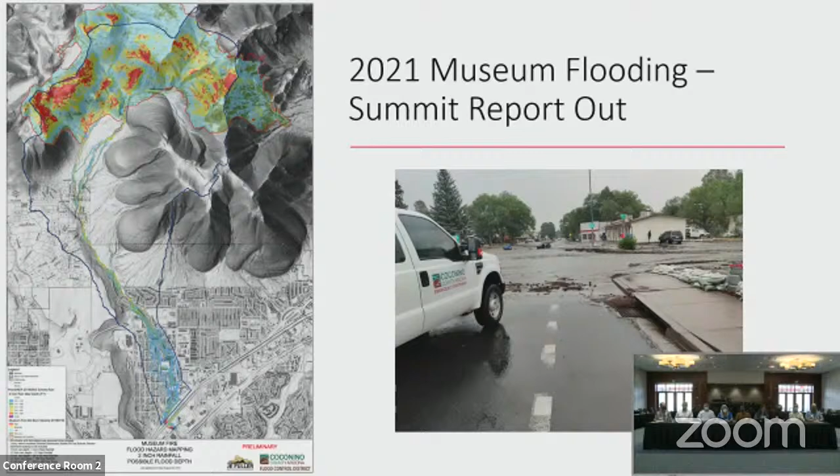I'll walk through the participants and summit agenda, and then be turning it over to Joe Leverage to my left here, as well as to Julie Lead, who's to my left. I first, though, want to introduce the rest of the attendees at the summit. Some of them served as what we call table leaders during the workshop session yesterday.

To my far left is Mark Lamer. Many of you know Mark. He's been tireless out in the museum flood area working with residents. And next to Mark is, oh geez, I knew this would happen, Stephen Irwin. Sorry, Stephen. Stephen too has been out in the flood area working with many of you. Gary Miller is an engineer with the city.

Julie, Joe, myself, Christopher Tressler serves as both the county engineer and the flood control district engineer. Andy Bertelson, public works director for the city. As well as Caleb Lanting with Peaks Engineering. And so these were the people who participated. We had over 50 participants. And again, just a truly robust discussion coming out of that brain trust.

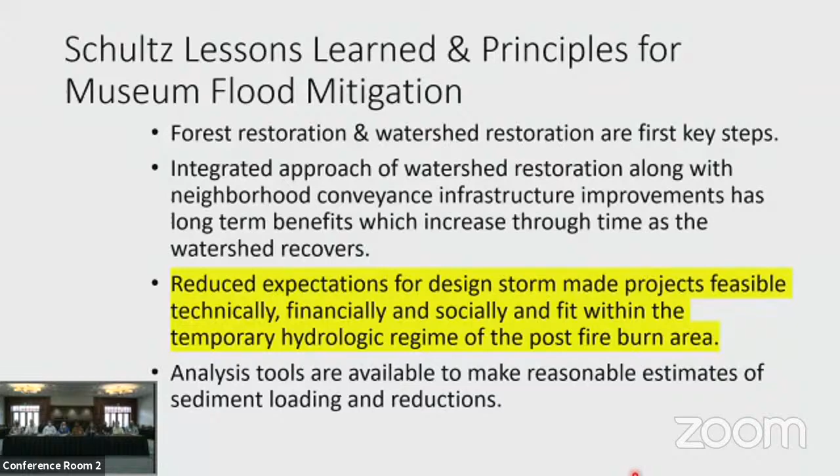And again, I want to reiterate those feasibility criteria. It has to be technically, financially, we say socially here, but really it's technically, financially, legally, and then environmentally and culturally feasible. And that's the next step, to start looking at that feasibility. Fortunately, we do have analytic tools that can help us make reasonable estimates of sediment loading and those reductions. And you'll see that high on the list of next steps. On to the next slide here.

I think one of the most important messages, and this is a tough message to deliver, but we will design to some target storm, possibly some range of storm level. You hear 100, 200, that type of thing. We're probably down in 5-10-year storms in terms of this post-wildfire. But we will not be able to design to every storm. It is not physically possible. It's just not feasible. All those factors of feasibility won't let us design to every storm. What we do will help reduce the impacts during larger storms, but it won't eliminate those impacts. And that's really important to understand.

And importantly, we really emphasize, and one of the important reasons to do this summit was, it's about relationships. We really understood that with Schultz, like the relationship that we had with the Forest Service, the relationship that we had with the various regulatory agencies, the relationships we have with funders, the relationships that we have with the community. Relationships are key.

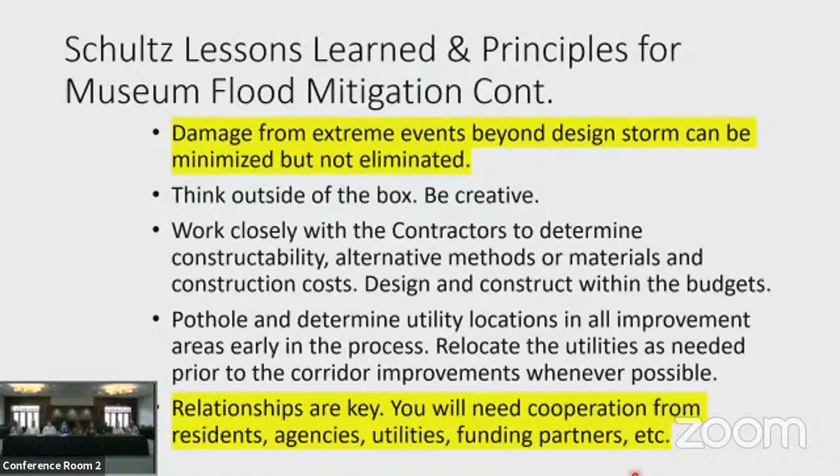And again, just that sense of caution that these are ideas, and you're going to hear a lot of ideas, and they're not all going to get implemented because some overlap. And as you work through, you may add something else, and you may take some other piece of the puzzle. This is a very complicated puzzle that we're building. So with that, I'll turn it over to Joe. Thank you, Lucinda.

One of the main questions that we had to discuss during this is the hydrology. What is the design flow? How much water are we going to design the downstream infrastructure to, or mitigation alternatives that we come up with? To give a reference point, in Schultz, the 5-year, 6-hour design storm was chosen for all the improvements, and those varied in the corridors from 200 to 400 CFS. And I'll give you a reference point when we're talking through some of the numbers on Spruce Avenue Wash.

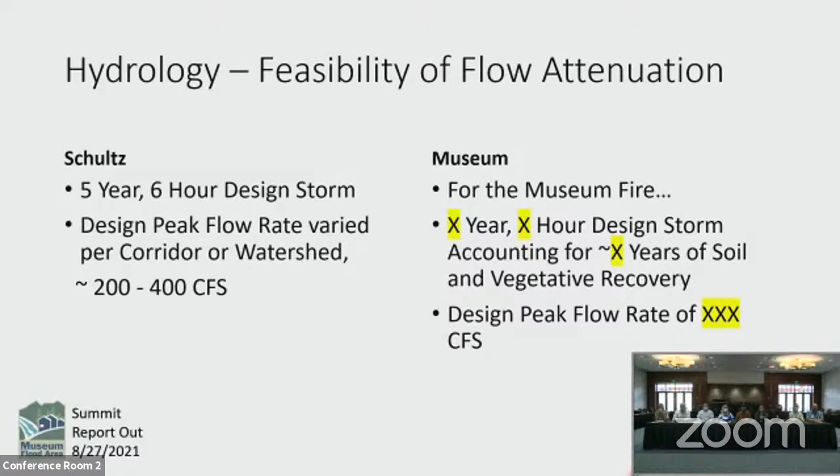So the question is, for the Museum Fire, what is the year event? What is the probability of that event that we're designing to? What hour design storm? And how much recovery are we assuming will happen in the watershed over the next period of time when these improvements are being implemented? And to frame that in a little bit, give you a little bit of background on some existing pre-fire numbers that are out there.

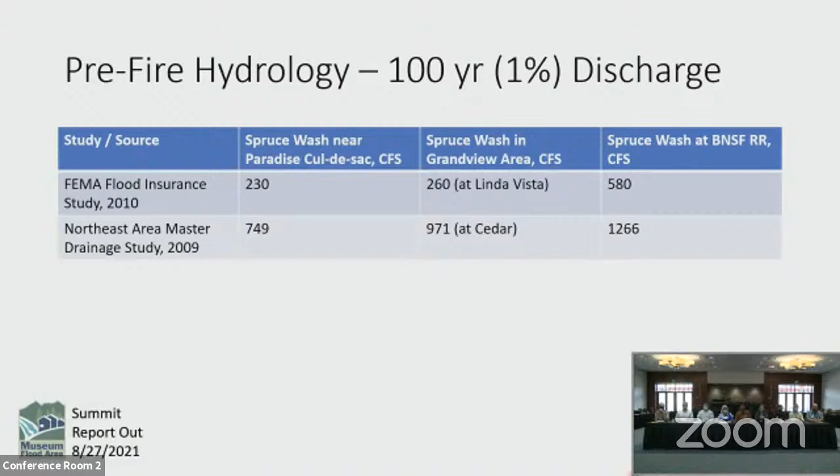So the FEMA flood insurance study, I'm not going to dive too much into the numbers, but it's a pretty low flow, 230 cubic feet per second. The Northeast Area Master Drainage Study from 2009 modeled that higher at 749 CFS at Paradise. So there's kind of a big variability in even pre-fire flows that could potentially come off the watershed.

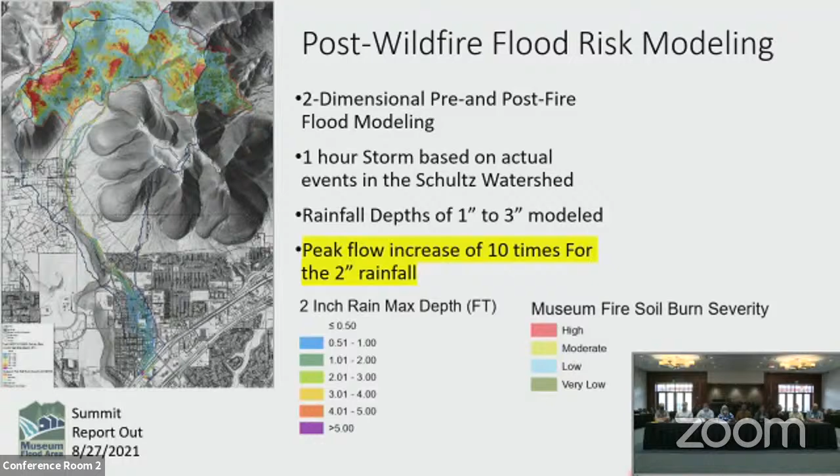So to backtrack a little bit, the post-wildfire flood risk modeling that was performed in 2019 was done for very specific rainfall events that were experienced in Schultz. Very intense 1-hour rainfall events that we wanted to provide a variability in what the downstream impacts were. So a 1-inch to a 3-inch storm event. For a point of reference, between pre-fire and post-fire, flows increased approximately 10 times in the modeling. So we have much higher flows, as we've experienced in the 2-inch rainfall event.

So far this season, to give a little bit of context to this discussion and why we are where we are, there's 4 rainfall gauges within the watershed. One of the gauges was installed in 2018, and you can see that in the green bar. That rain gauge had about 10 inches of rainfall on it in 2018. The next red bar and dark blue bar, these are the rainfall that we experienced in 2019 and 2020, very low, our period of nonsoons, as it was termed.

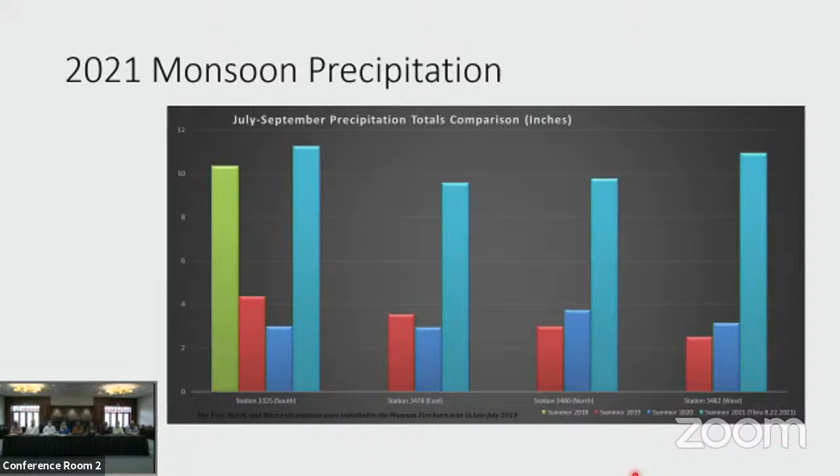To date, in this monsoon, we're right about 10 inches plus or minus of rainfall, much higher than we've previously experienced and higher than normal for this time of year. So that gives a little context to why we are seeing the rainfall, the flooding impacts that we are. And monsoons are not finished yet. Correct. Monsoons are not done yet.

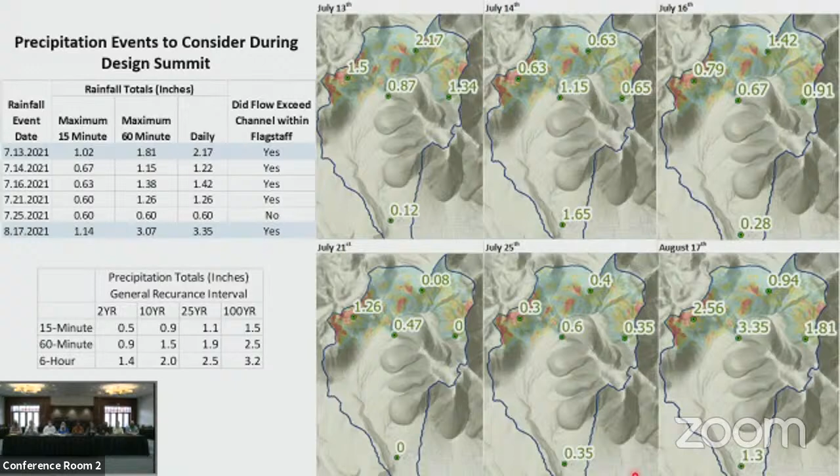So I'm not going to dive too much into this slide, but what I want to express with this is that with each of these rainstorms, this is a dynamic watershed. It's constantly changing in channel conditions. Every storm is unique that impacts the watershed. And we as a team are keeping a very close eye on how each of these storms impact the watershed, what that looks like downstream, and taking that into consideration when we're planning for mitigation alternatives.

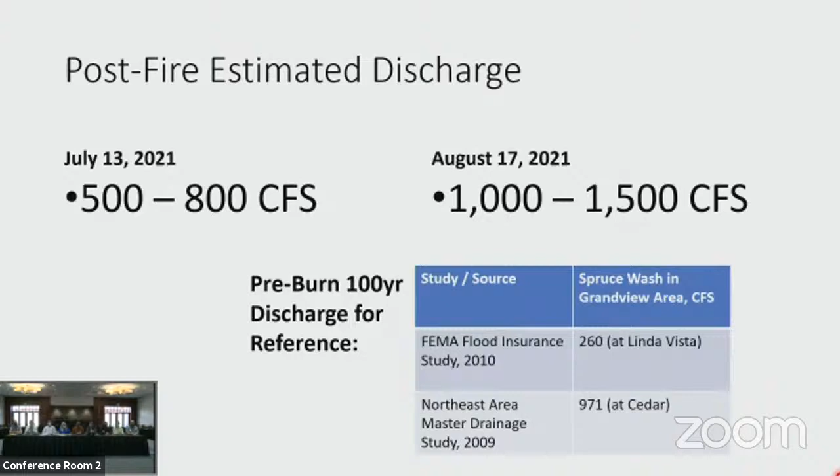So to give a little context also now for a couple of the flood events that we've experienced, the first one and the last one last week. So the first one's approximate range is 500 to 800 CFS by the time you hit Linda Vista, to put some bounds on that. And the storm event this last week was in the range of 1,000 to 1,500. So it was a lot larger, as we saw in the watershed with the higher rainfall values. So much higher than you're ever going to experience pre-fire. And that's what we have to wrestle with at this point.

Okay, so identifying what our design discharge is is a complicated discussion. Something that we've wrestled with over the last couple of days, and we're beginning to put some brackets on what we think are design storms that are not only feasible to design to, but also provide a relative level of mitigation for the impacted areas.

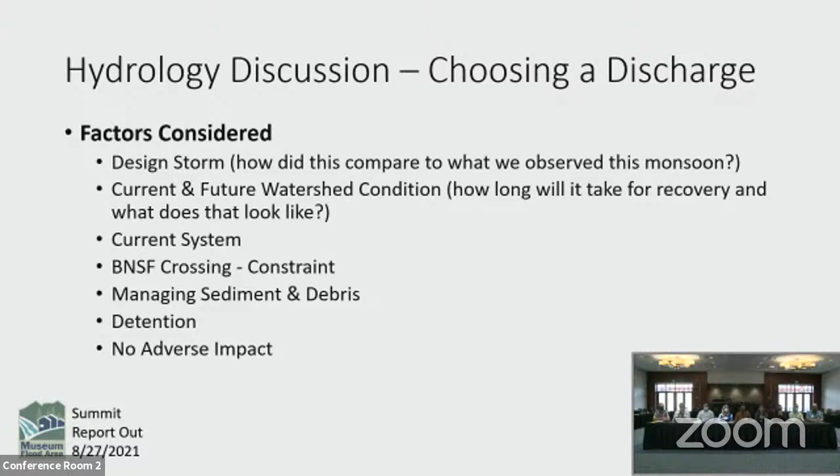So we want to consider how does our selected design storm compare to what we've observed this monsoon? And then looking forward, what's this watershed going to look like in 10 years? How much recovery is going to happen? And then how does all of that variability in the watershed play into our current system? You know, we have constraints like I-40 and the BNSF railroad crossing downstream of Route 66. We have constraints of existing infrastructure, and so these are all components that we're wrestling with to try and determine the design discharge that gives us the most benefit that we can reasonably implement.

Some considerations also are what happens upstream. How much sediment and debris is managed on the alluvial fans upstream of Mount Elden Estates. And if there is any attenuation, reduction in flow rates through detention, if that's even a possibility, and like Lucinda said, we really need to now dig into the details of that. And again, using this design discharge to then understand what potential adverse impacts are with each one of these projects that we're going to talk through.

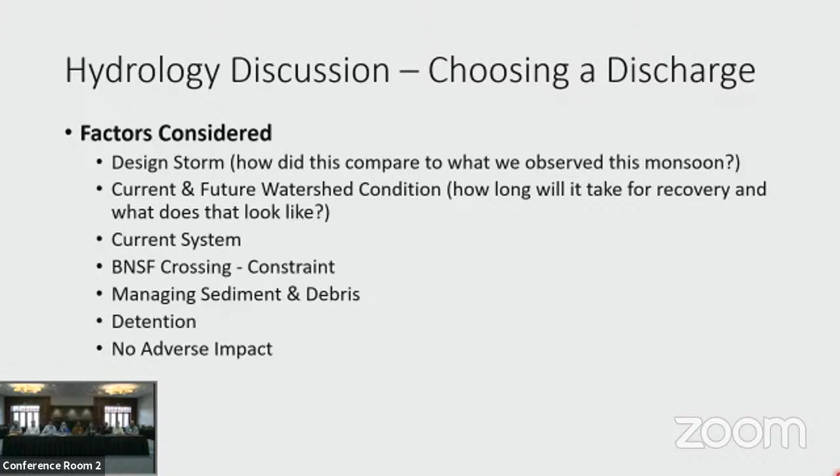And to go along with that, the feasibility criteria. So we're in the conceptual phase. We're in the idea to conceptual phase. And what needs to happen from here is understanding the feasibility. So like Lucinda said, it's from the technical, financial, legal, environmental and cultural aspects. And there's a lot that wraps into that. And as a team, we'll be honing in on what our design discharge is, and we are not quite there yet, but we're moving towards understanding that.

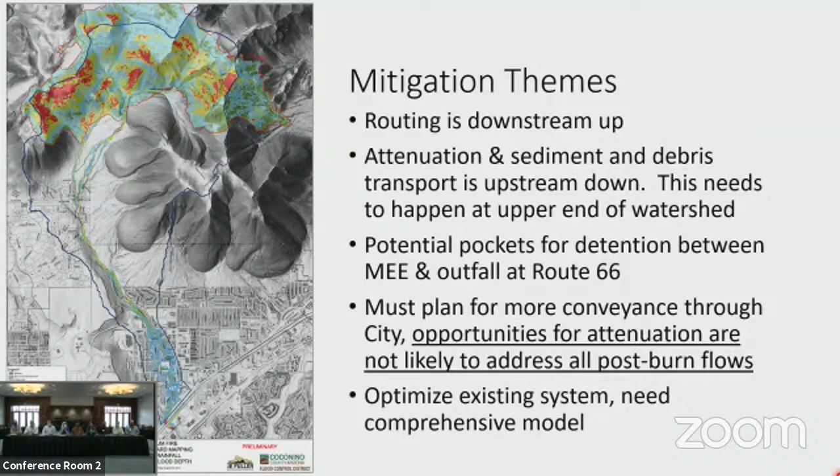So I'm going to start at the very top of the watershed. The objective at the top of the watershed is to reduce our sediment load, to reduce that large woody debris coming downstream and plugging the system. We need to look at forest restoration in the non-burn area, as Lucinda had said earlier. And then there's an opportunity here for an alluvial fan. And I'll show you what that might look like on the next slide.

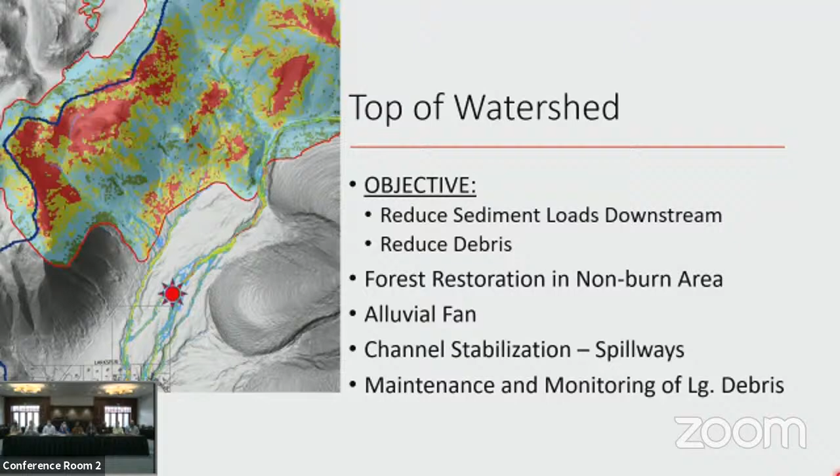We also talked about channel stabilization and the challenges with channel stabilization. The terrain in this upper watershed is so steep. It is difficult, if perhaps not impossible, to get large equipment and material in there to perform that work. And then maintenance and monitoring of how that debris flow happens, how that sediment moves, will be a long-term, ongoing effort.

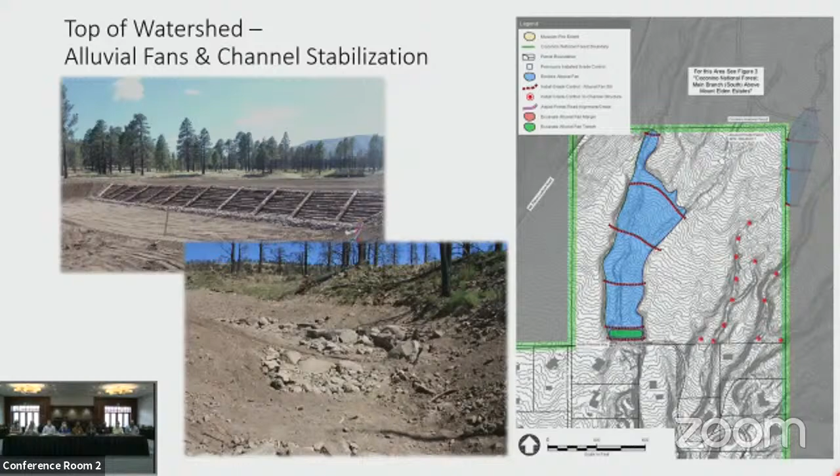So moving a little bit south on this map, this is the end of Paradise right here. Thank you, right there. And then we have the Mount Elden Estates neighborhood. And this is Forest Service in this zone. As we talked about possible mitigation in this area, we talked about channel improvements through Mount Elden Estates. There's some variation, there's some scour happening, and we need to get in there and do some work to help stabilize that channel, to have some consistent capacity through that channel section.

As we move downstream, just north of Paradise, there, this is an opportunity for a possible offline basin. Things that we wrestled with, things that we talked a lot about as groups: What is the access to that? We know how much maintenance a basin requires, ongoing for the duration. And how do we get there? What does that look like? What does that mean? Is it feasible? There could be that smaller area for attenuation.

So just a quick definition on what that means. Attenuation is when we hold back the water and then slowly release it over an extended period of time. Instead of having a large rush of water, we just slow it down. It doesn't change the volume of water. It just holds it back and slows it down. And that's the purpose of a detention basin, is to provide that attenuation to reduce some of those surges.

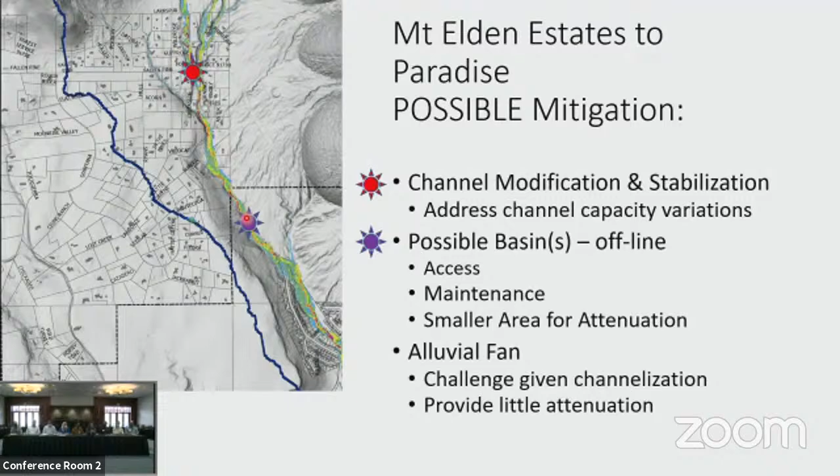And as we said before, some of this upper part of the watershed, we're really focused on that sediment removal, or sediment reduction. It's impossible to remove. Sediment reduction and debris removal and reduction. And I would say one of the primary purposes for that sediment removal is to help the systems that we have in place today function better than we're seeing in the condition of flows that we're getting right now, because we're getting a lot of that sediment transport into the city systems that is frankly causing problems currently. Clogging it up.

Thanks, Gary. All right, we're going to move downstream a little bit. This is the cul-de-sac on Paradise. And then right down here in the bottom right of the image, that is the culvert crossing at Linda Vista.

Through here, we talked about channel widening. We have gotten the nod of approval, Christopher, from US Forest Service to do some channel widening at the pinch point, the existing pinch point at the very top of Paradise. And this is great news and work that we can move on very soon. So there'll be some widening at that location to provide some additional capacity.

We did talk about possible more permanent barriers through this section. That's not necessarily in the immediate work that I just mentioned. That's channel widening. And then as we move a little bit further south, right down there, sorry about that. At the end of Park, there is great access to a city-owned parcel, and there may be an opportunity at this location to provide some attenuation, provide an additional area for sediment dropout. It's got great access and we can make the most of it at that location.

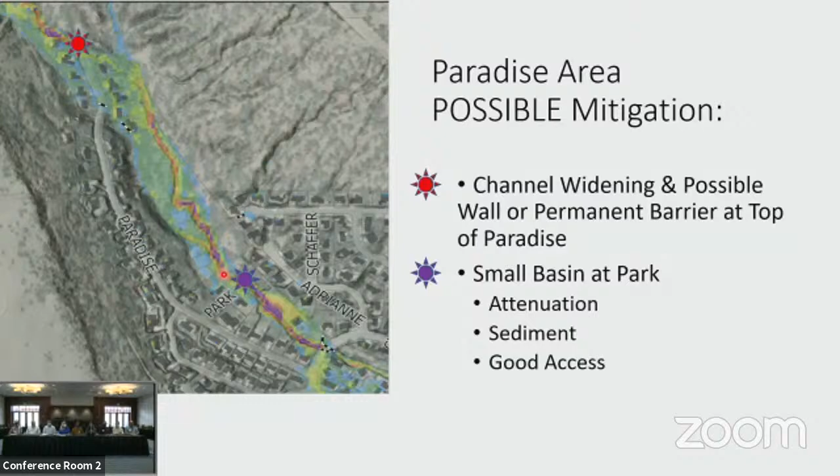And I'm going to go to the next slide to talk about the Linda Vista crossing, which is right up here, Linda Vista. This is the Y, or the wedge, I think is what we're calling it, at Cedar at the slip lane. And then we have Cedar in the bottom part of the photo here. Now, Linda Vista, we need to follow to the outfall. So as we talk about strategies like storm drain infrastructure or increased channel conveyance, we have to chase that all the way down, all the way south.

So as we talked about as a group, opportunities to go to the east side of the existing channel or to the west side of the existing channel, we know that we need to chase that all the way down through Sunnyside to Route 66. I believe I could say with confidence, it's unanimous in the engineering group that we need to look for bypass, that we need to look for additional conveyance at the Linda Vista crossing. And that simply increasing at the Linda Vista crossing for a larger storm event would be pushing a problem, causing some adverse downstream impacts. So we need to look for an alternative route.

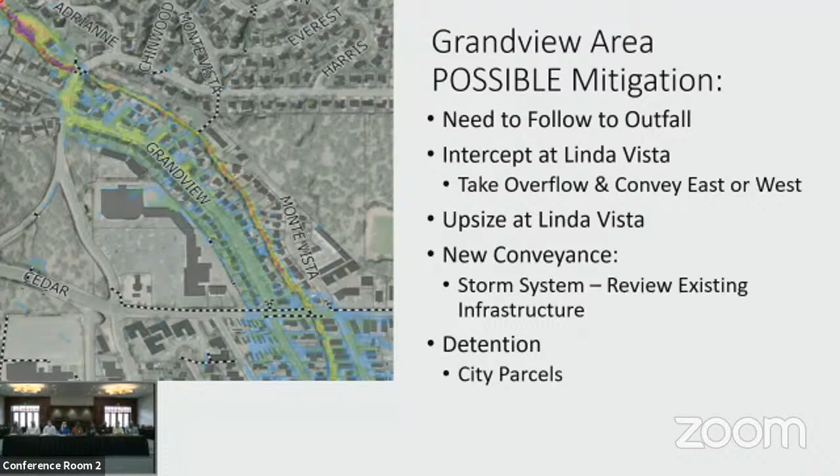Thanks for that, Gary. So moving through North Sunnyside, possible mitigation, I think we can say we all generally agree we need to maintain. There's a 60-inch storm drain that runs under a portion of the channel. This is just north of Arroyo Seco and the townhomes, that inlet. I think many that are watching today are fairly familiar with that. We've got that section of storm drain at that inlet, and that extends all the way south. It continues all the way to First and Route 66. And it is important to maintain that system. It has good capacity. It certainly doesn't have enough capacity for these post-burn flows that we're seeing, but it does have capacity. So we need to maintain that.

We talked about some channel hardening to increase the conveyance. So when I talk about channel hardening, I'm talking about concrete, riprap, slurry, some of those materials to help with erosion on that channel, to help with efficiency on that channel.

And then, as I mentioned before, we need to chase that east or west conveyance further downstream. So this is the current crossing of Spruce Wash at Cedar. And so as we look to possible bypass conveyance, we're either going to be running down the west side of the Sunnyside neighborhood or the east side of the Sunnyside neighborhood. And where do we see opportunities where we don't have as many underground infrastructure conflicts, where we might be able to use an existing system line and be able to upsize that?

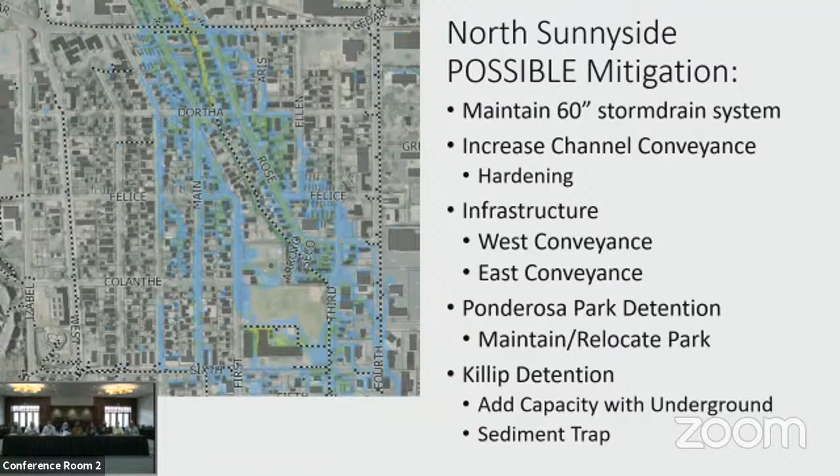Moving on to South Sunnyside. Sixth is at the very top of the image here. And then you can see this is the railroad down here in the bottom right corner of the image. And again, it comes back to chasing those east or west bypass flows all the way out.

We talked about that detention basin possibly at Killip Elementary School, perhaps an expansion of that basin to Ponderosa Park, but we also recognize that the park is an amenity. And to turn that into something other than its current use, we would need to find park space or be able to have both of those uses, which can become challenging.

We're also chasing this all the way down. If we upsize the infrastructure all the way to Route 66, all of a sudden we're increasing how much water is getting to that area. And we need to look for opportunities again for detention. So another one of those pocket areas is perhaps close to the outfall.

So the outfall of Spruce Wash is at the Blimpie, the giant station at 1st and 66, a little bit across from Salsa Brava for reference. There might be an opportunity just to the south and west of that location, if there is a new outfall point, to provide that attenuation, because we can't be sending more water underneath BNSF Railway than we do now.

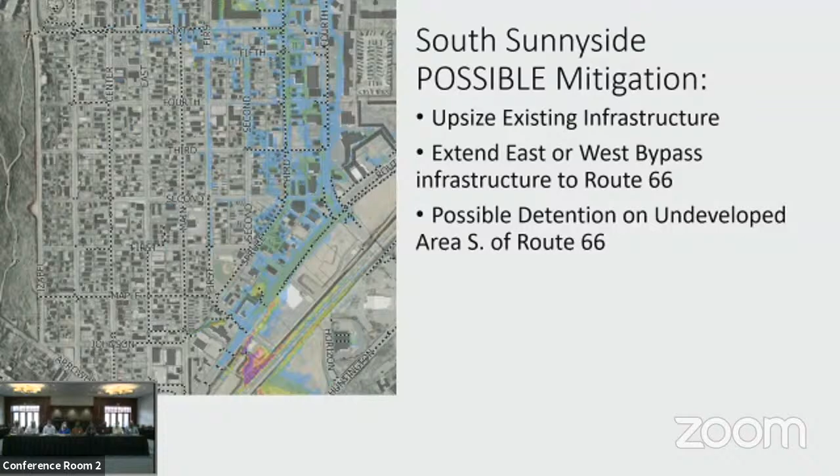So with that, I'll turn it over to Lucinda. Great, thank you, Joe and Julie. I think that's an important overview of what was involved and what came out. Obviously, there was a tremendous amount of detail that was discussed of a very sophisticated technical nature. I think you both did a really great job boiling that down and providing a good sense of what some of those opportunities are.

We put this slide in because it's so important to understand that in everything that is done, we have to make sure we're not creating any adverse impacts, either upstream or downstream. And so in this process, there's actually a whole system nationally that's been developed to look at this. And we did this in Schultz.

One of the policies that was adopted by the Flood Control District Board of Directors was to adopt a no adverse impact set of standards. And that analysis was done by an independent third party engineering firm with that expertise.

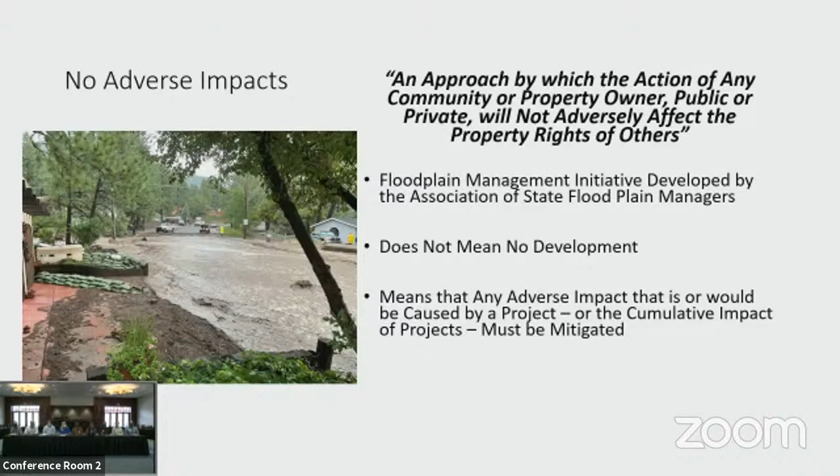So the other things that I want to just talk about, and I think you can go ahead and go to the next slide here. Before I jump into that, I'll come back to that. Let's go ahead, we'll go to the next slide here to the next steps. So in terms of next steps, these are really what we see as some of the crucial next steps. First is developing that overall drainage master plan. And this is particularly crucial. It is an integrated system, above and below the city, but it's particularly critical for the city infrastructure and looking at, as Joe was saying, how do we best optimize the system in the city?

Another two key steps, as I mentioned earlier, are crucial: we've got to get the rest of the watershed up there thinned. That forest needs to be restored. That watershed needs forest restoration. And in addition, that watershed restoration work that's largely on Forest Service land needs to take place. Those two are fundamental to everything else we're going to do. And the alluvial fan work, when we say watershed restoration, that's working with those alluvial fans to make sure that they have the long-term capacity to capture and reduce sediment, and whatever channel stabilization we can do to reduce sediment production. And then another factor we talked about is dead trees. As those trees that were burned die, they're going to fall over and become mobilized by flood events. We need to look at working with the Forest Service to get those dead trees managed in some way so they don't end up in infrastructure downstream.

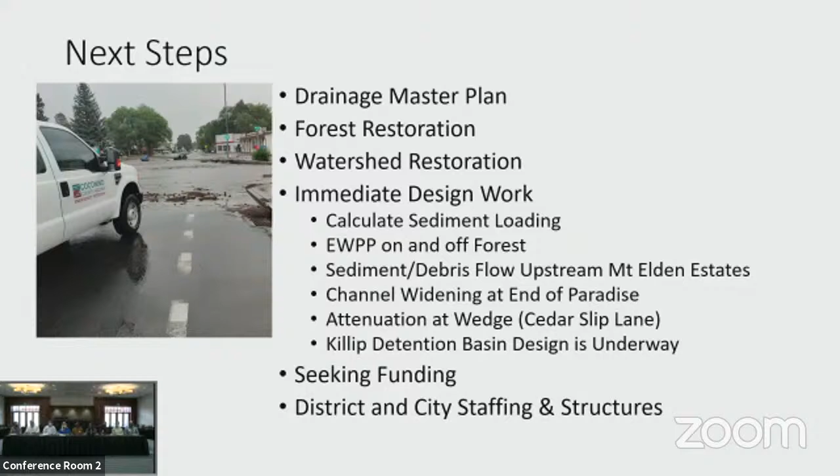Again, we won't be able to mitigate to every design storm, but I want everyone to know that this team, we're all in it together, right? All right? Yes. We're all in it together. Definitely. You've got an incredible brain trust and team here, and everyone's very committed. They care about what's happening to people on a day-to-day basis through this whole experience. And we're ready to march forward. So thank you very much.

With that, I think we have a couple of elected officials that have joined us, and they may have some questions. Can we go ahead, Lindsay, and see if any of our elected officials have any questions for us? I have a question. Thank you for the presentation. Thank you for the hard work and bringing everybody together. I know this is quite an overwhelming endeavor and requires everybody on the team to really think out of the box and create the solution.

My question is going back to what Lucinda just talked about in terms of timeline. I listen and I kind of see about 4 phases in here: the analysis phase, the engineering phase, and then the building implementation phase, and then finished. What are we talking about for each of those phases? Because I hear we've got to build this plan and make some decisions, but like Lucinda said, people are suffering, and in the Sunnyside they're suffering a lot and repeatedly. And so I just want to make sure that they're not waiting another 2 years before something is implemented, because I know there's been plans before, and I know the situation is different and now it's at crisis level.